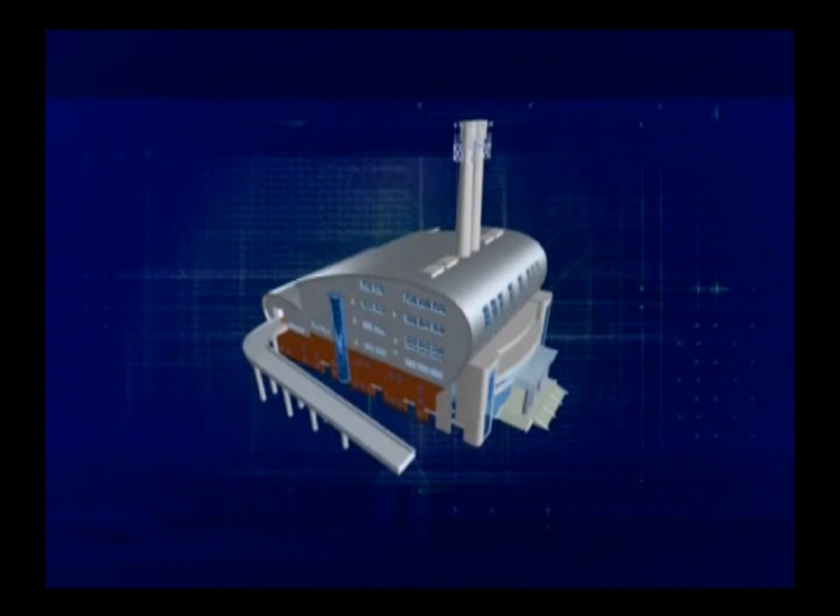1,000 tons of waste is produced on a whole day in any town, and waste management systems are needed to be organized in view of development.

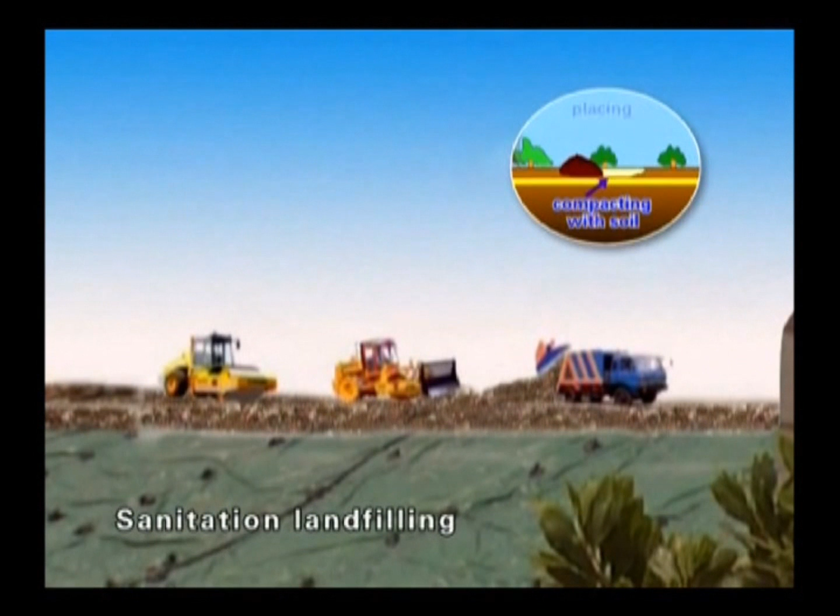At present, 3 main kinds of waste management methods are widely used, including sanitation landfilling, incineration, and composting. With sanitation landfilling, waste will be piled on a sewage-proof surface and compacted on soil. This method is easy to handle and used worldwide. However, landfilling occupies most areas of land resources and is not ideal.

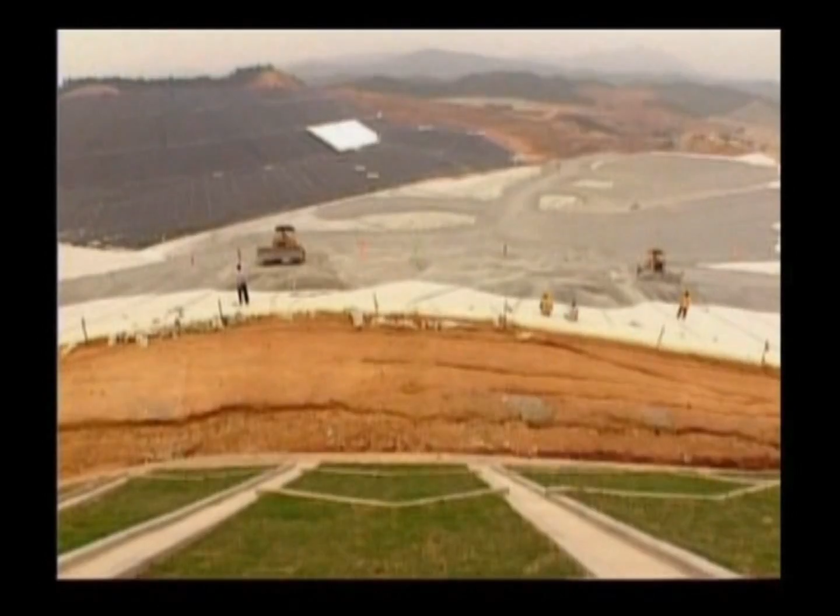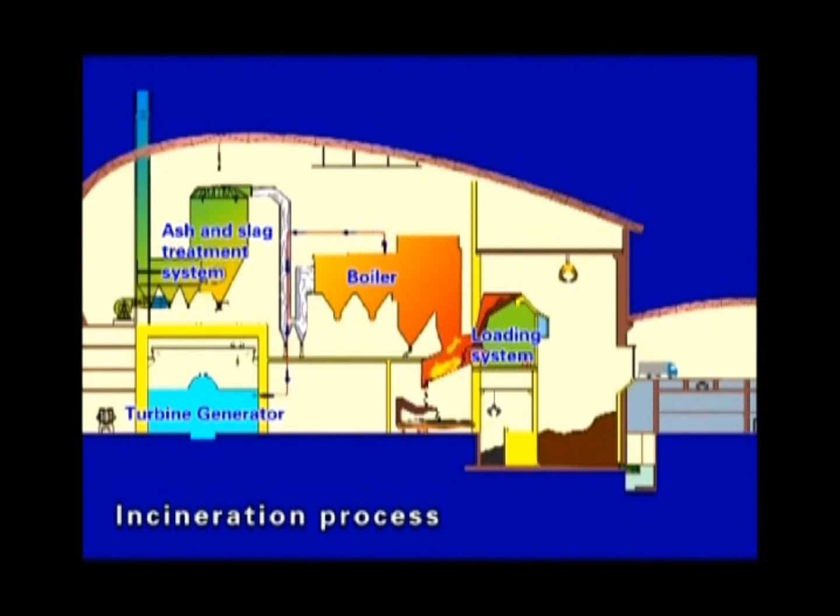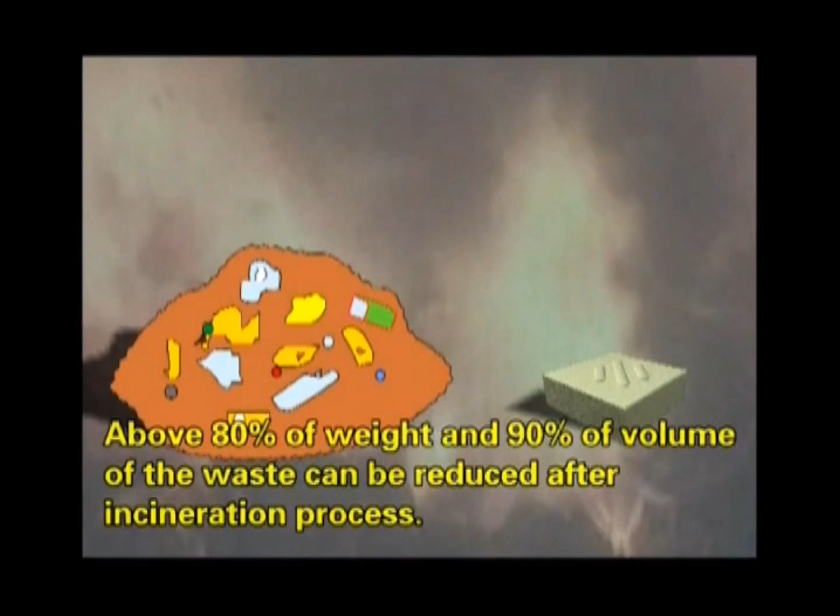This process helps waste management and electricity production. Above 80% of weight and 90% of volume of waste can be reduced after the incineration process. Such types of waste management methods are used in Europe and Japan.

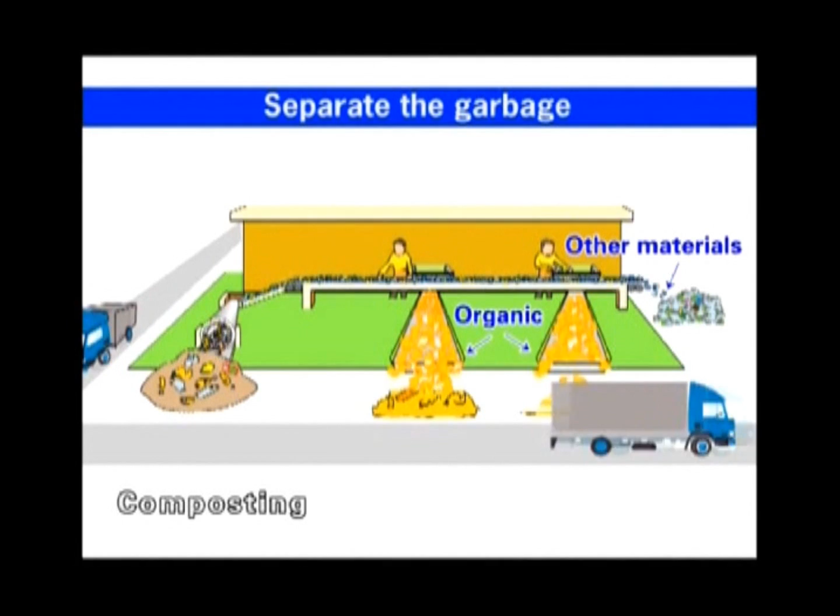Guangzhou plant, China is the first waste management plant established in the Yongxing village of the Taihe town at the Baiyun district. Through heavy traffic, you have to travel about 25 kilometers to reach the downtown center. 1,000 tons of waste is to be processed in this plant.

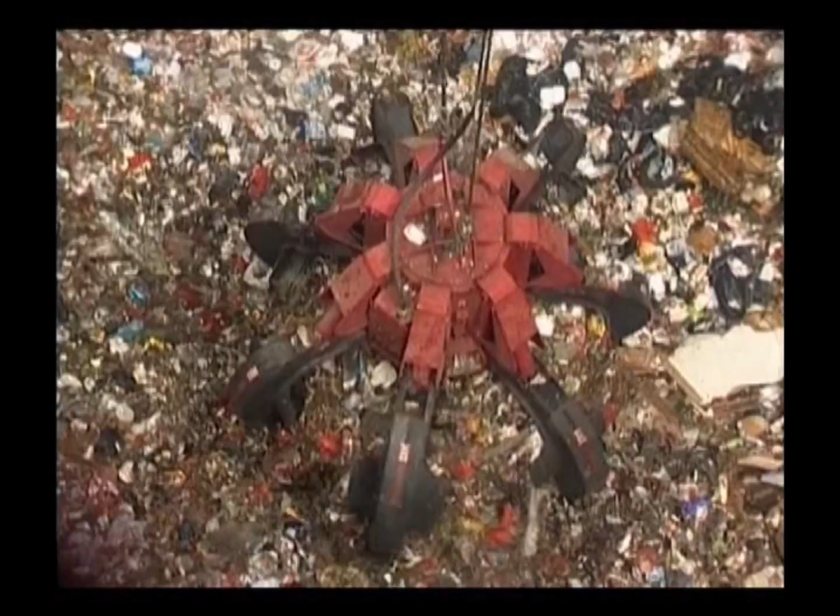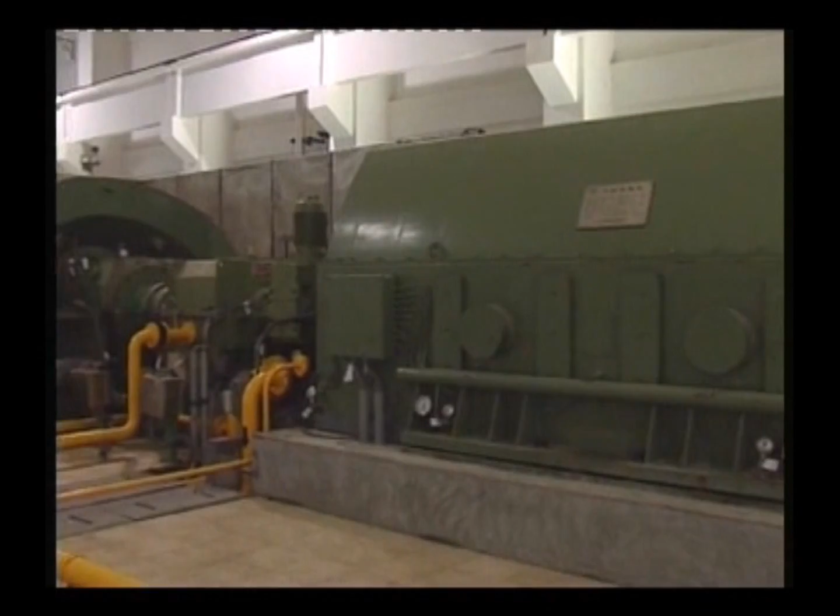This plant was established by the Guangzhou municipality government with incineration and composting standards adapted worldwide. 1,040 tons of household waste is processed here per day. The plant is one of its kind which adopts the processing method through sub-high pressure parameters, 20% higher than other plants which have adopted pressure processes.

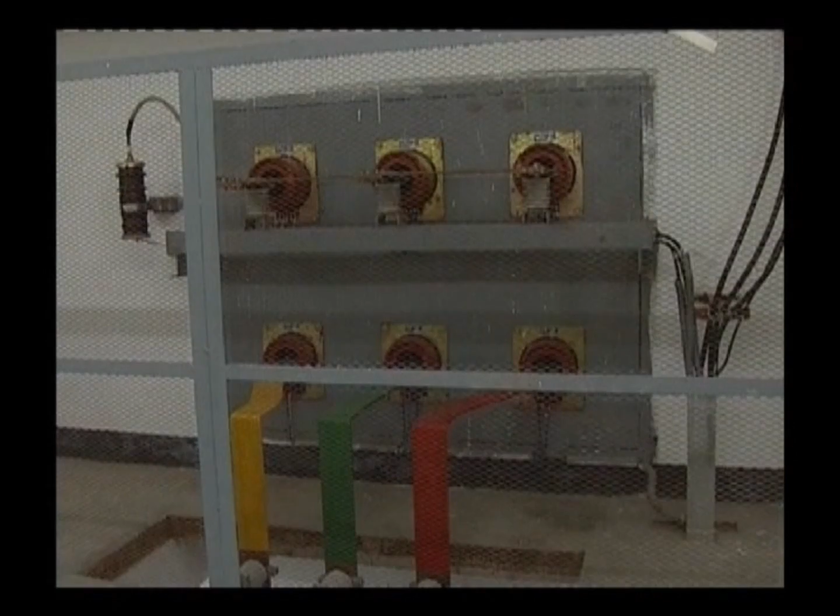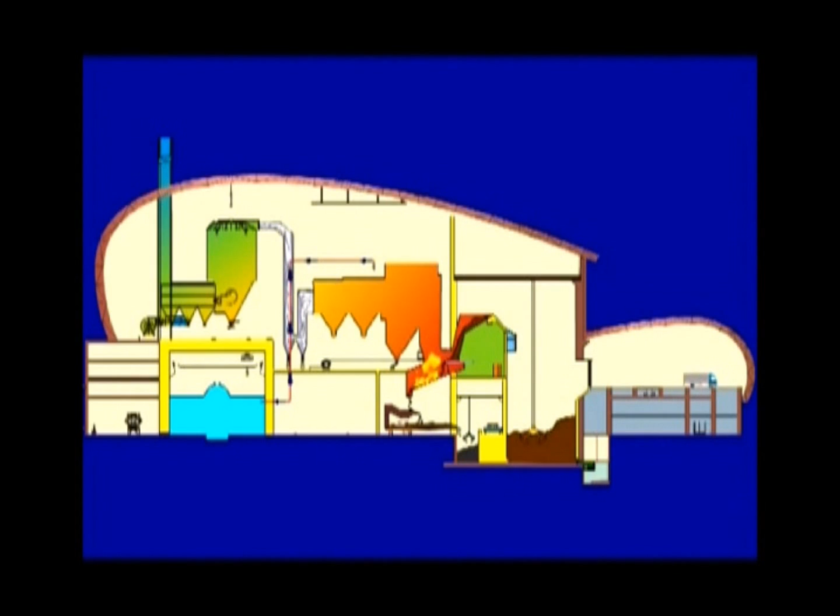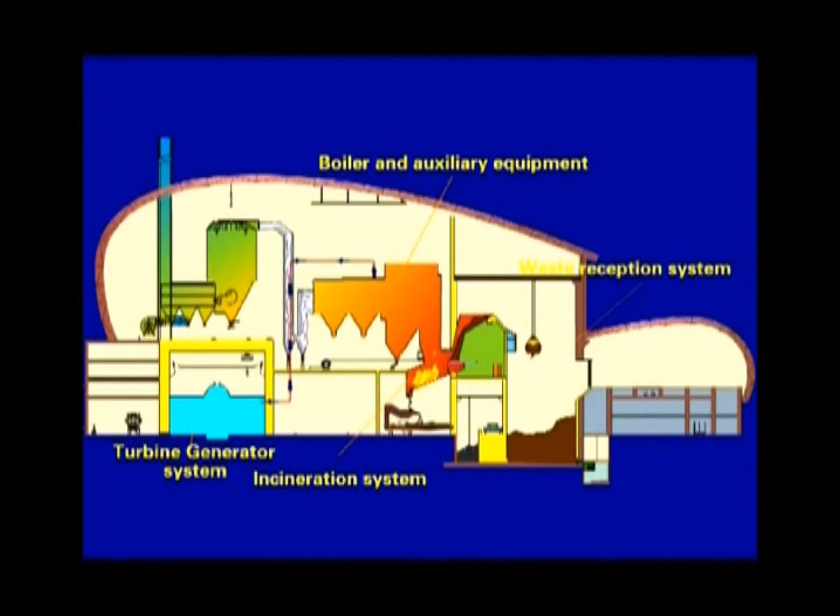The process of the waste energy plant consists of the reception system, boiler and auxiliary equipment, turbine generator system, flue gas treatment system, ash and slag treatment system, wastewater treatment system, auxiliary fuel oil treatment system, and automatic control system.

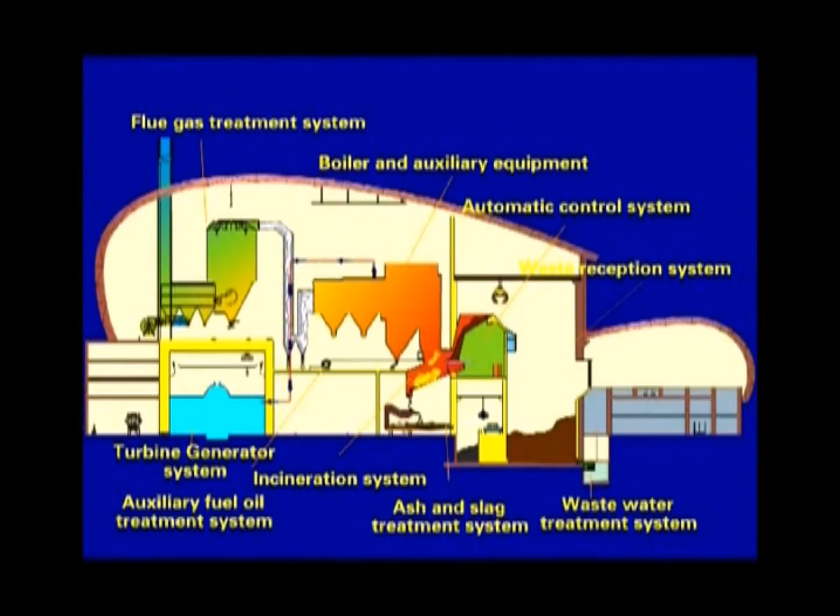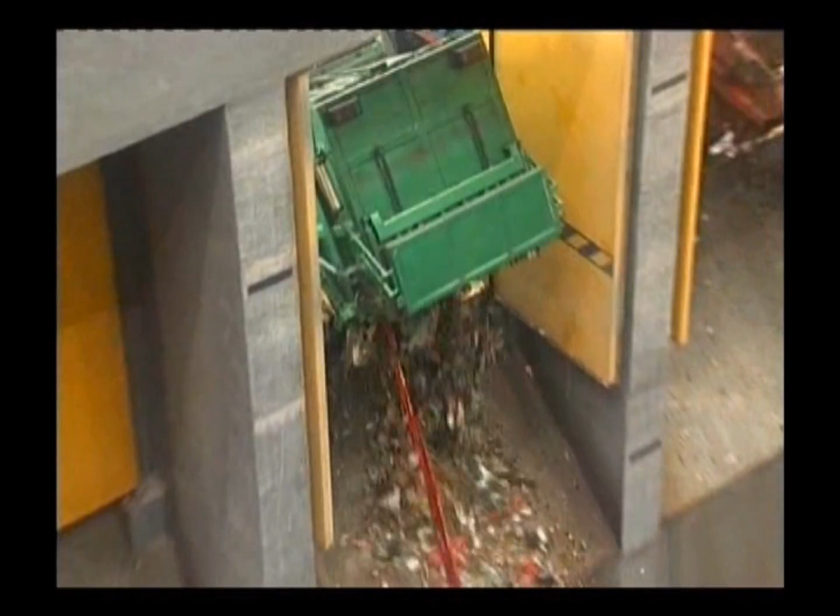Waste is transferred to the plant by trucks and measured on the weighing bridge. Then waste will be transferred to the refuse reception area and dumped into the refuse bunkers. Bulky waste would be shredded into small pieces by the crusher before being brought into the incinerator.

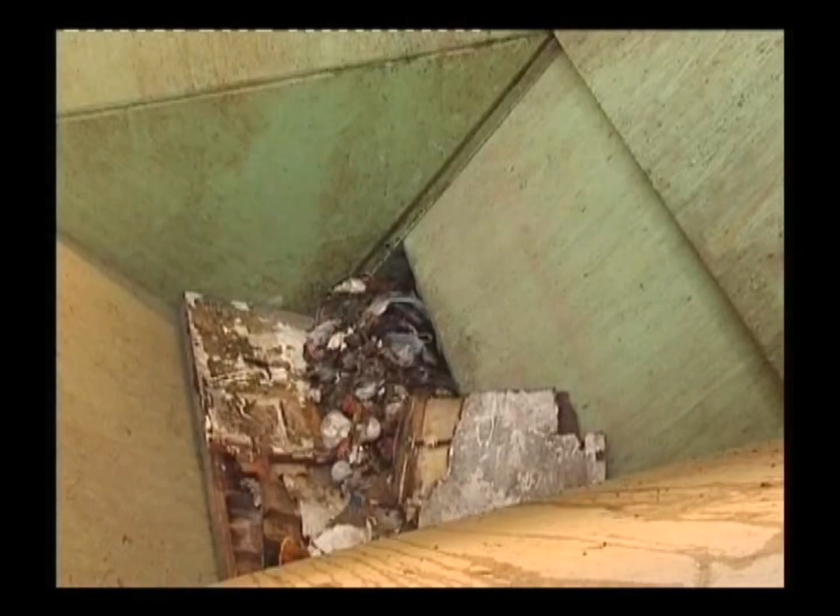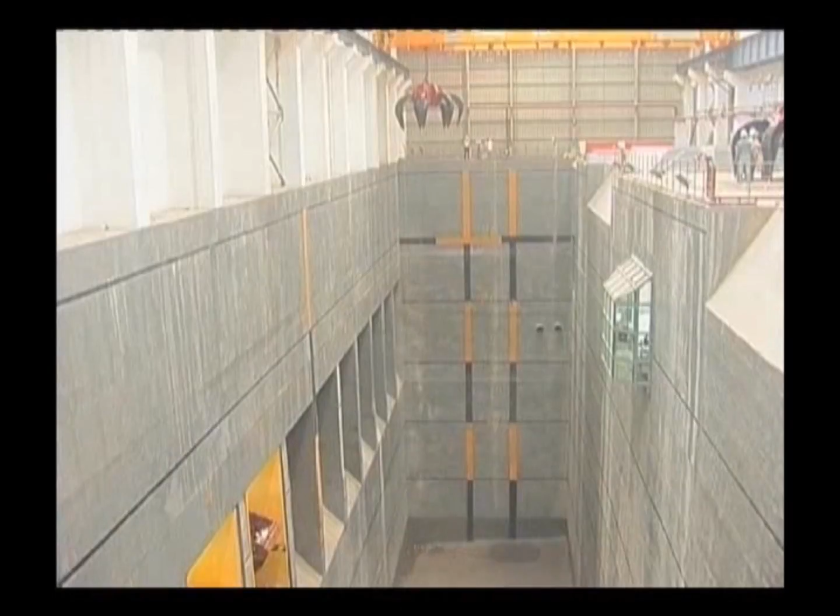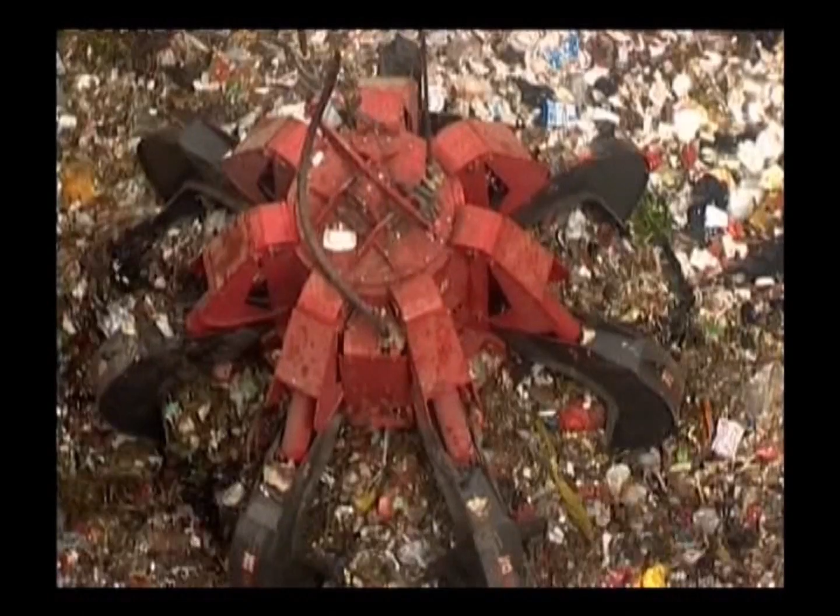The refuse bunker is sealed, maintaining negative pressure inside to avoid spreading of odors. The volume of the refuse bunkers is 8,000 tons and can allow 5 to 7 days of storage capability. 2 large refuse cranes are installed in the bunker. They will stock the waste into the hopper with the grab, and the waste will be incinerated to be burnt.

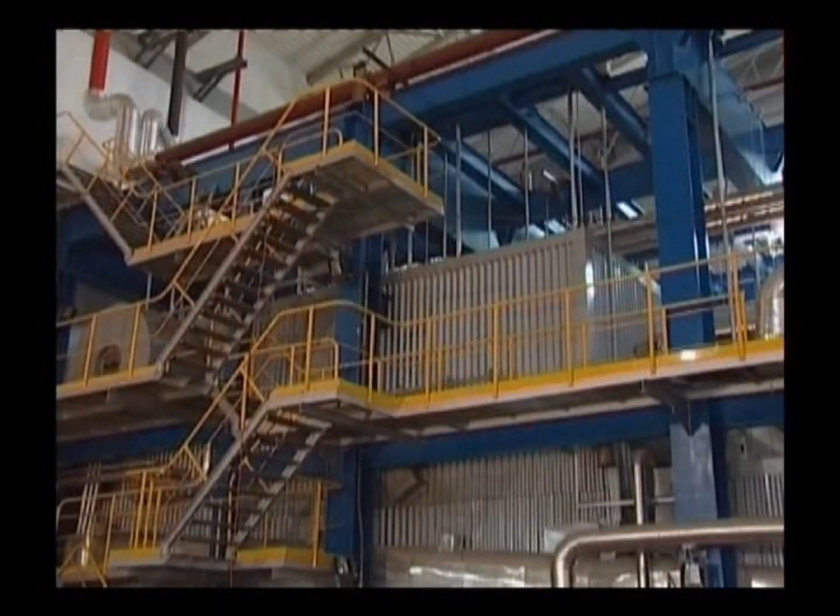Combustion of waste generates high temperature flames and may enter the boiler. The temperature within the burning area is around 850 degrees, with combustion running in 2 sections. The de-NOx system fixed in the boiler effectively reduces the maximum temperature of the fumes.

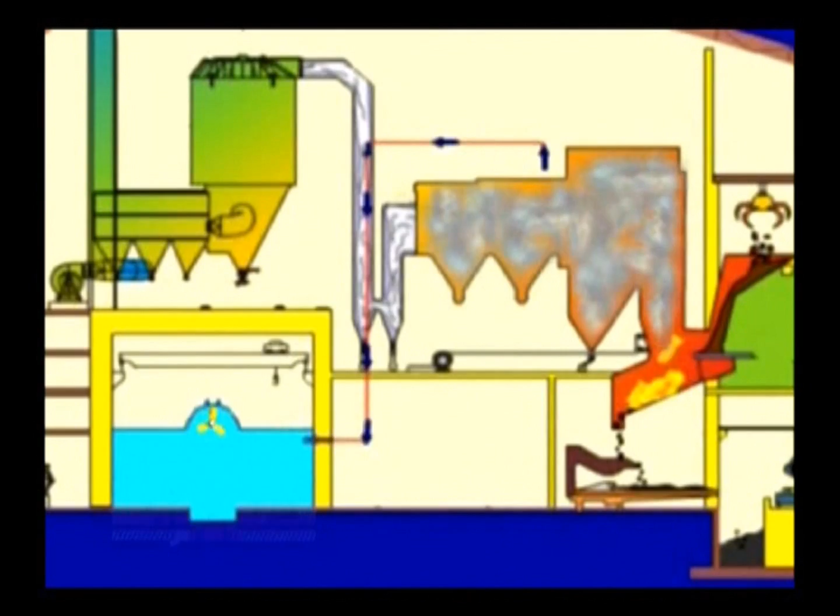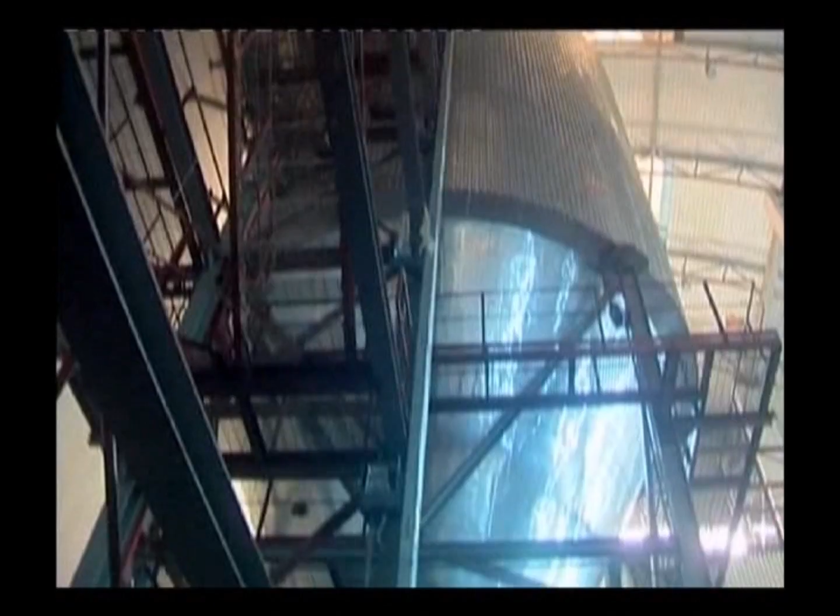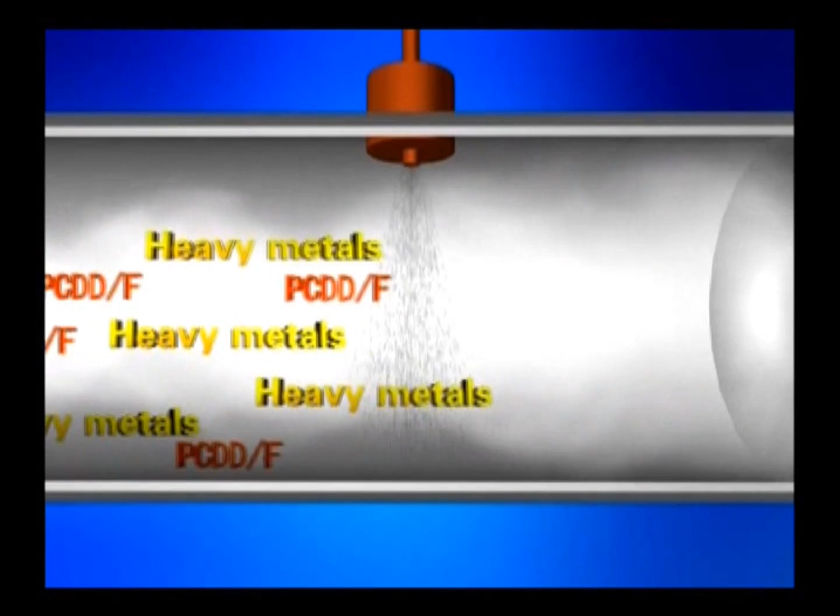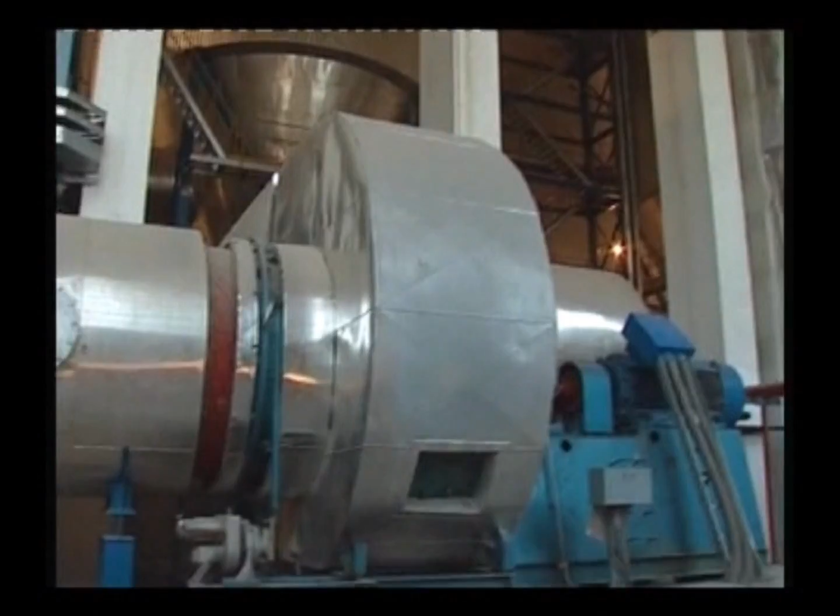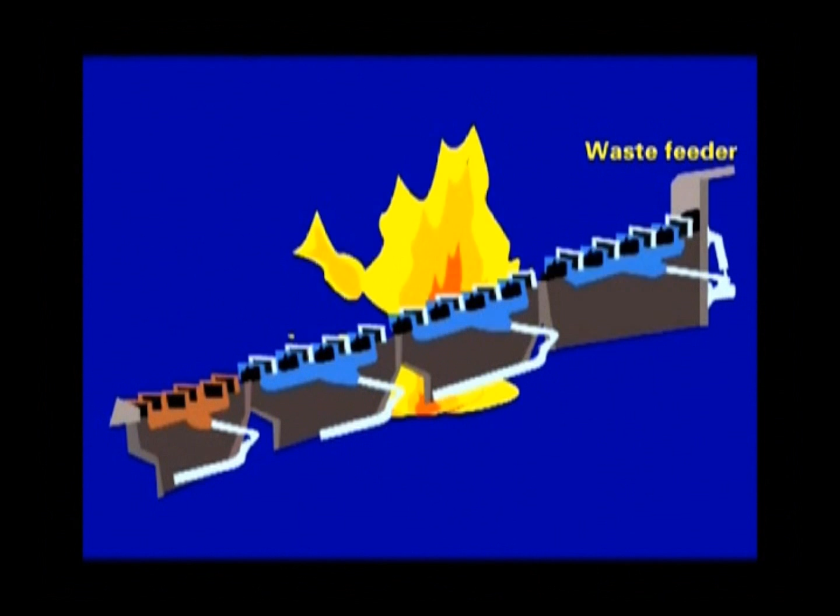After 4 processes of drying, ignition, incineration, and final incineration on the grate, 2 tons of bottom ash is generated per day.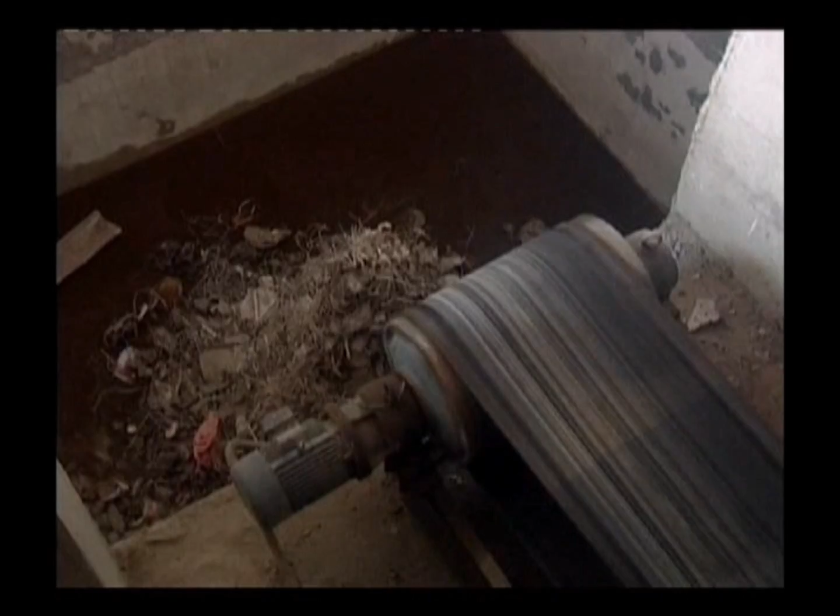Scrap iron is separated by a magnetic device installed in the dedicated bunker and can be used as construction materials. The scrap iron can be recycled, and ash collected in the bag filter can further be collected in the fly ash hopper, then conveyed into the residue bunker through the conveyance system.

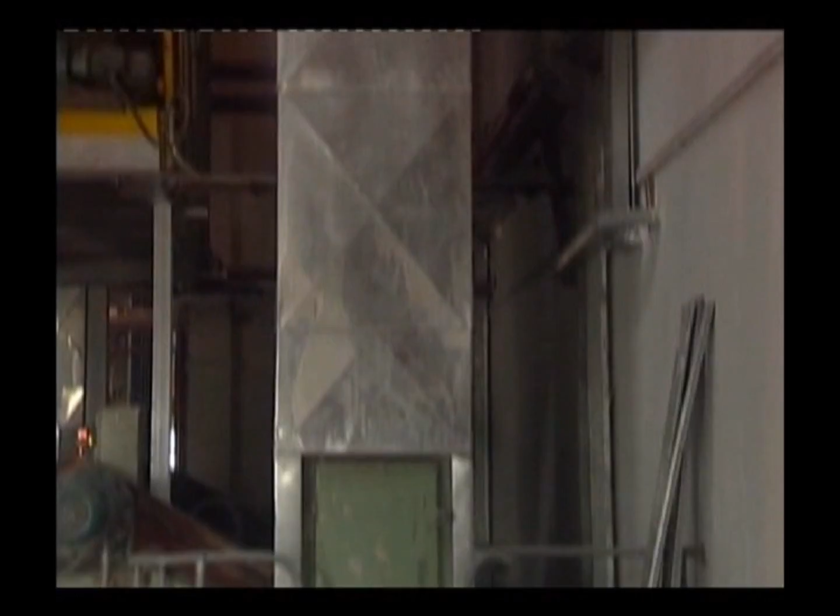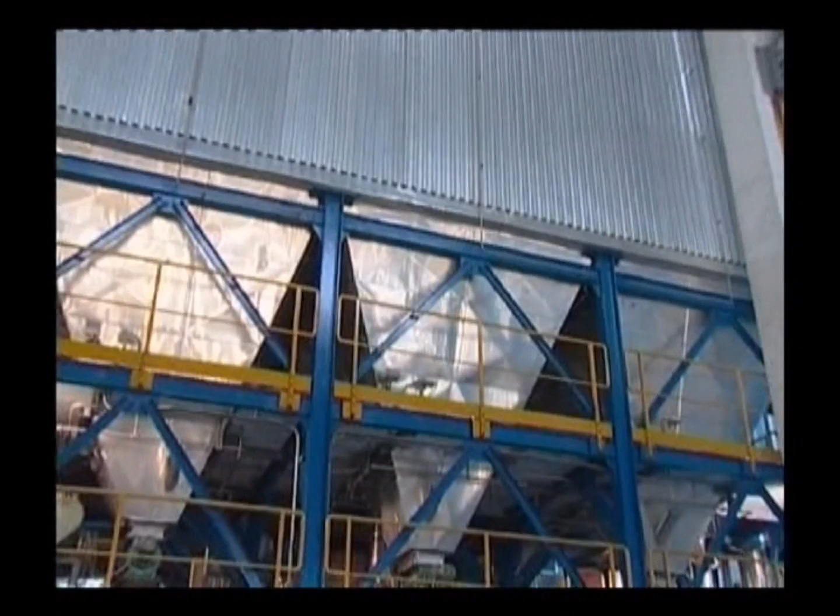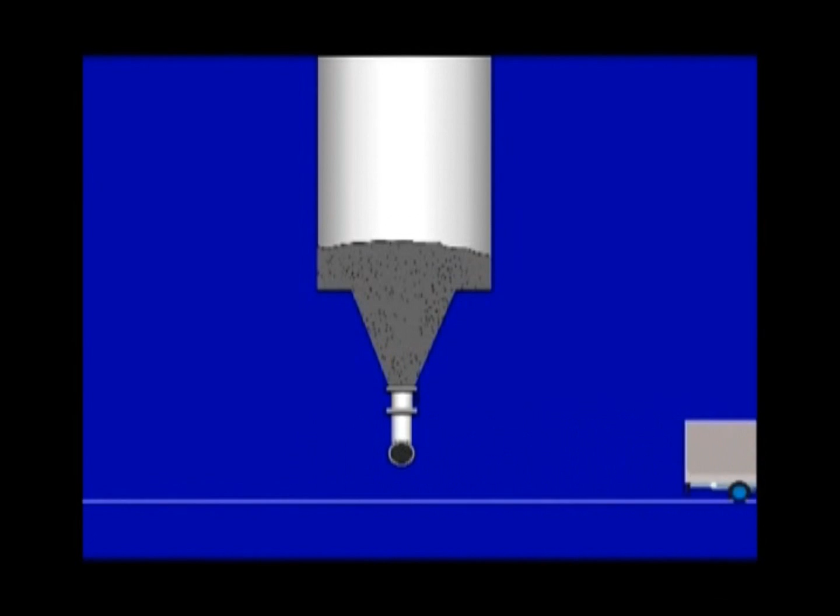Fly ash resulting from the Ca(OH)2 powder in the flue gas cleaning system is also conveyed into the residue bunker through the conveyor. Fly ash laden with heavy metal is mixed with cement and coupling agent by a mixer.

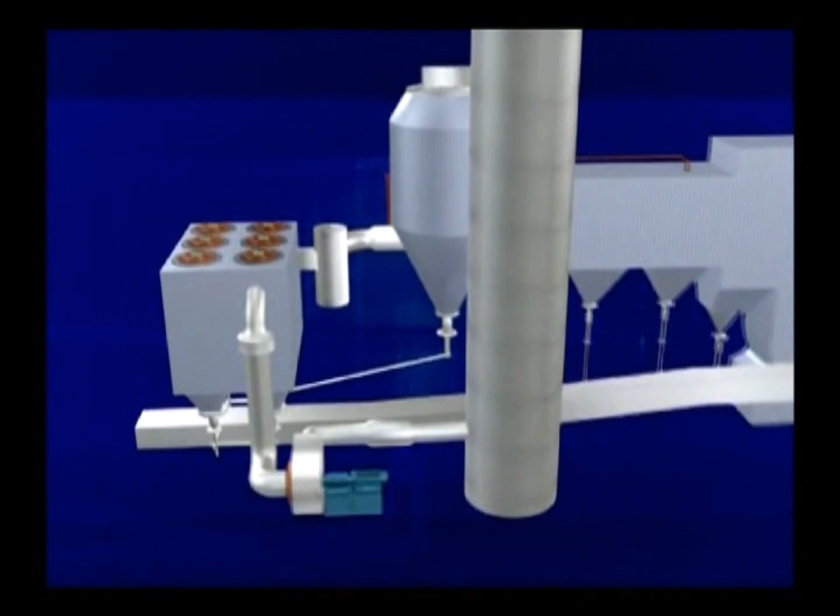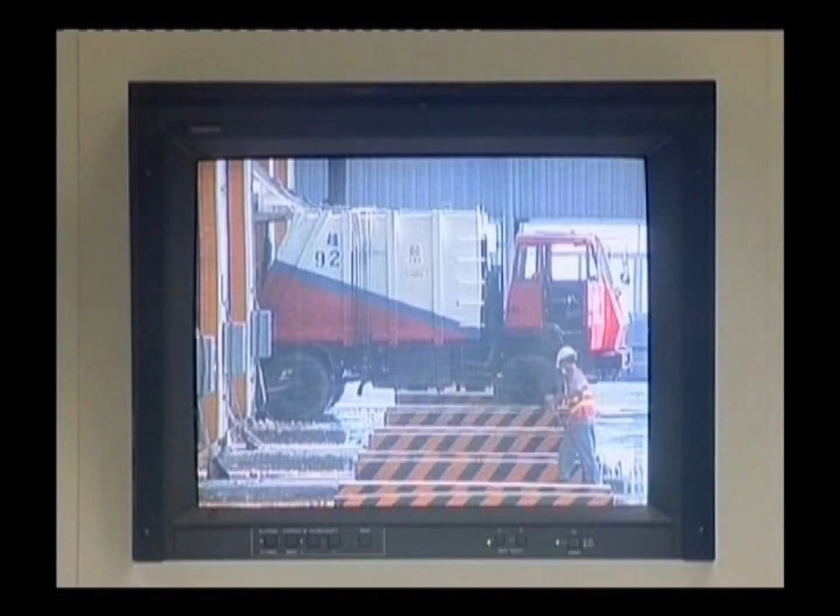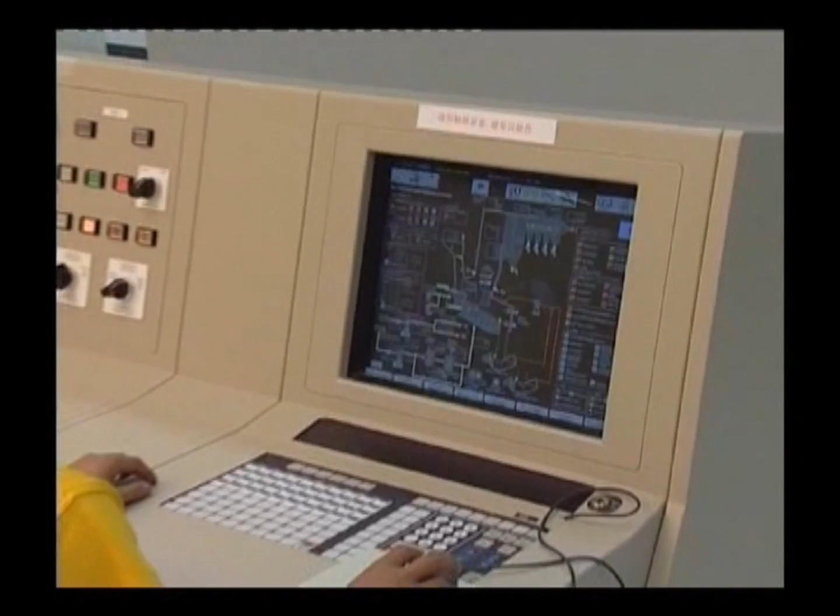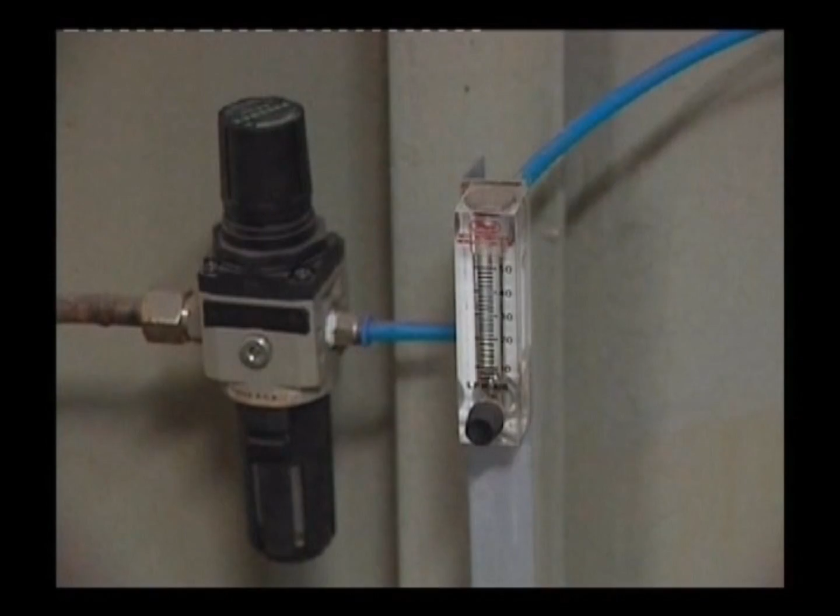Meanwhile, the system is capable of supervising with the advent of the latest technology. Here, the devices would offer safety, sanitation, and a protective working environment.

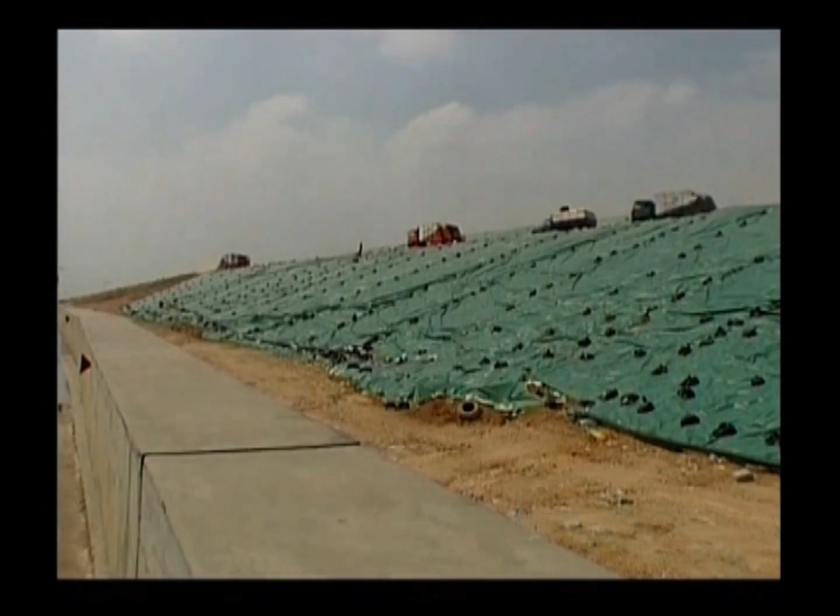In the near future, 2,000-ton energy plants are going to be built, and wastes will be treated by new incinerators, which aims to reach the goal in waste management and the way to achieve resource optimization.